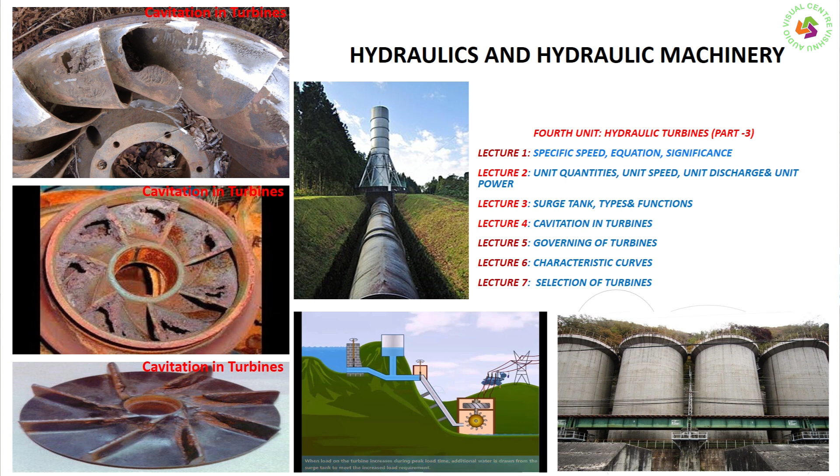Cavitation in turbines is a prominent phenomenon in reaction turbines. In impulse turbines, cavitation does not arise because the pressure everywhere is atmospheric pressure, so there is no question of any increase or drop in pressure. We don't see this phenomenon at all there.

But in the case of reaction turbines, we find that the pressure at the entry into the turbine is high, whereas the pressure at the exit of the runner is negative, meaning it is less than atmospheric pressure.

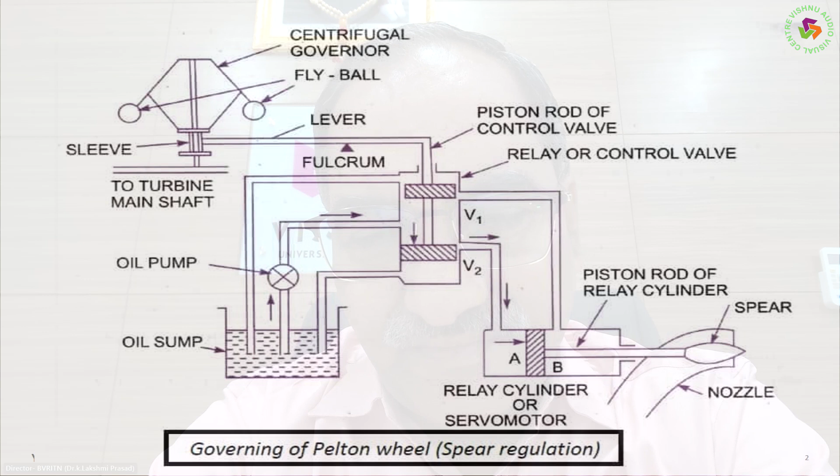There is a possibility that this pressure at the exit of the runner may be as low as the vapor pressure, the vapor pressure of the flowing fluid. The pressure at the exit of the runner may be almost the same as the vapor pressure of the fluid.

When the pressure at any point is brought down to the vapor pressure of the flowing fluid, automatically the liquid changes into vapor bubbles. These vapor bubbles flow along the direction, and when they reach a high pressure region, they collapse.

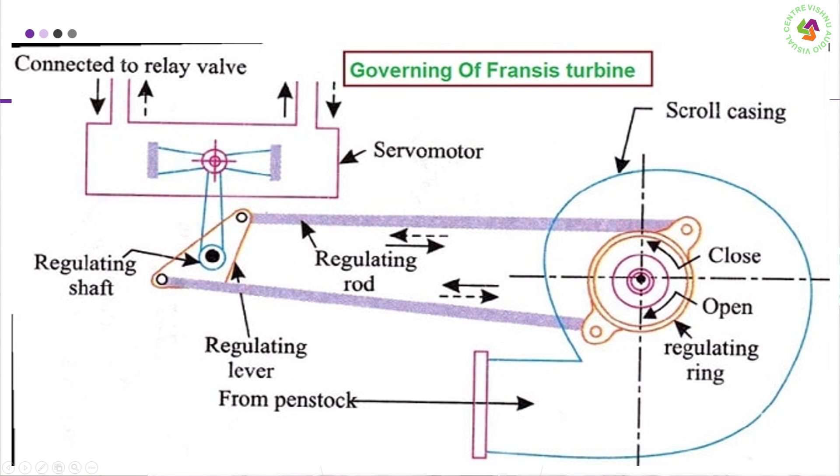When they collapse, the surrounding fluid rushes into this place. Thereby, there will be high impact pressure at that place. For example, this collapse of the bubble takes place near the boundary, on the runner blades, or at the entry to the draft tube.

So at that point, because of the high impact pressure, cavities will be formed. As these cavities are inside, which we will not be able to observe, over a period of time, these cavities extend, and finally the efficiency of the turbine drastically falls down.

So that is why we are supposed to continuously observe that cavitation does not take place in case of reaction turbines. Otherwise, the runner blades get damaged, the draft tube entry gets damaged, and this damage is phenomenal.

You can see the photos which I have placed before my lecture showing how the cavities are formed and erode the material of the runner, and that type of thing leads to fall in efficiency.

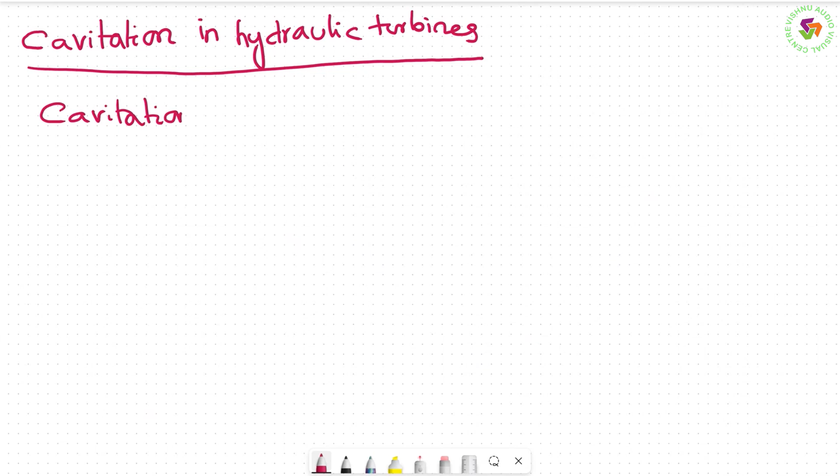So, cavitation in hydraulic turbines. Cavitation is generally observed in reaction turbines. In Pelton turbines, cavitation is not possible.

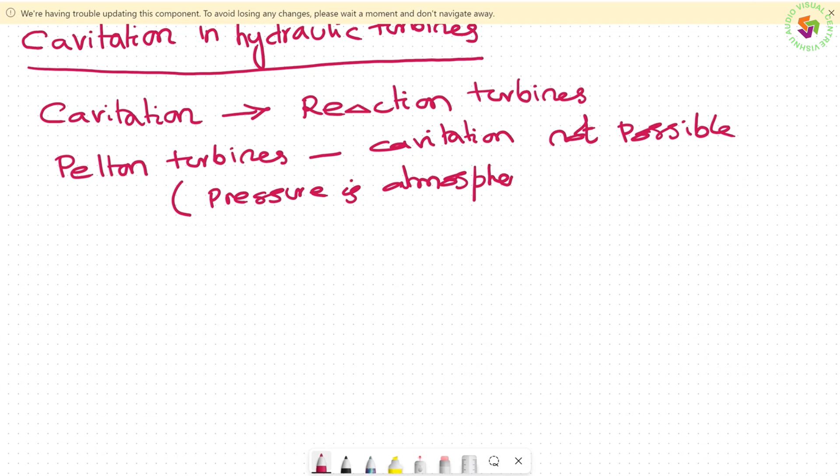Why not possible? Pressure is atmospheric everywhere. Whereas in reaction turbines, pressure at the entry is high and at the exit it is negative.

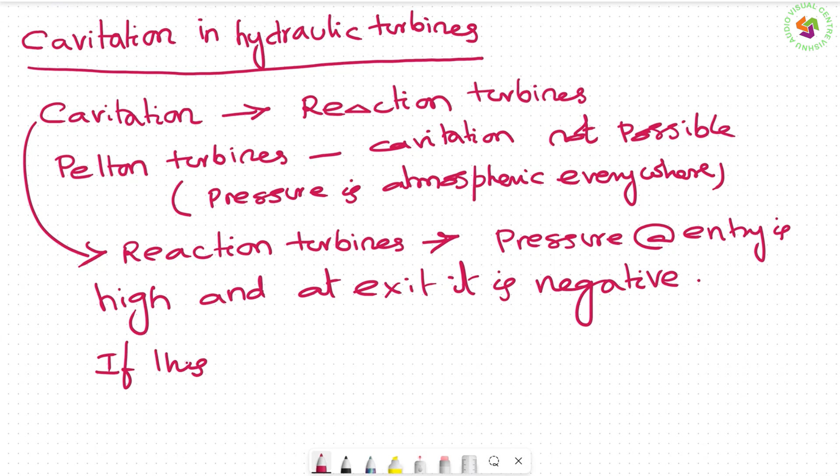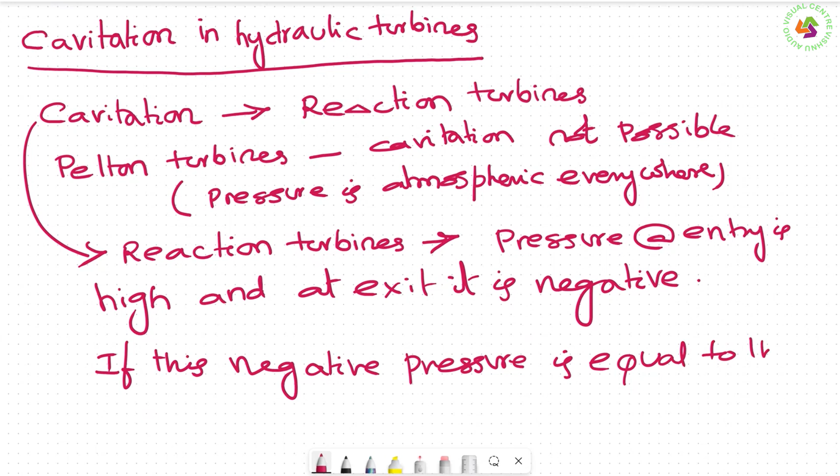If this negative pressure is equal to the vapor pressure of water, then cavitation occurs.

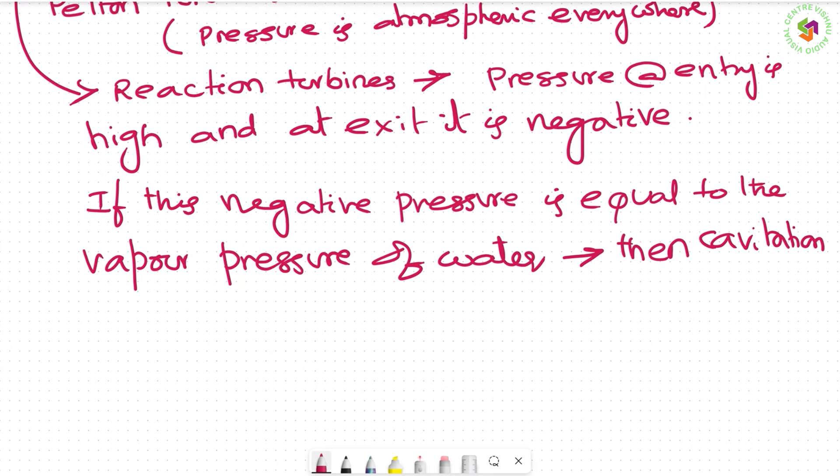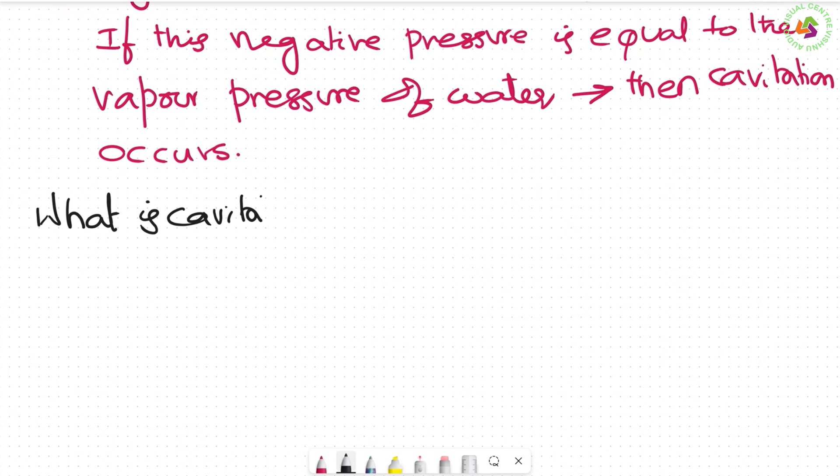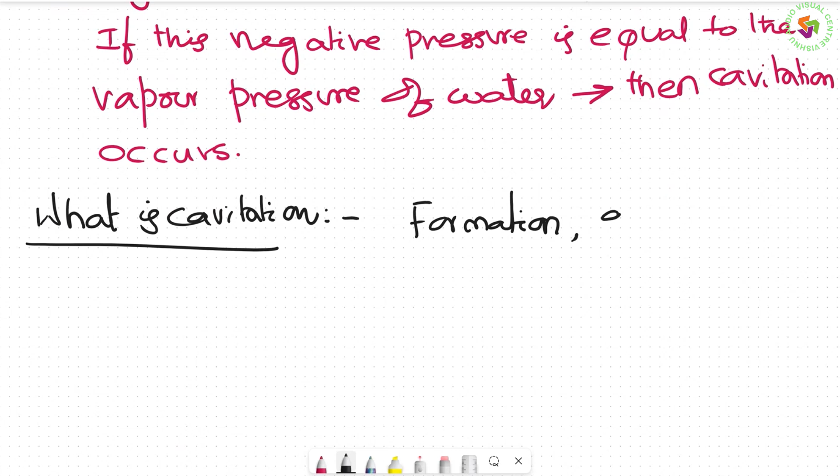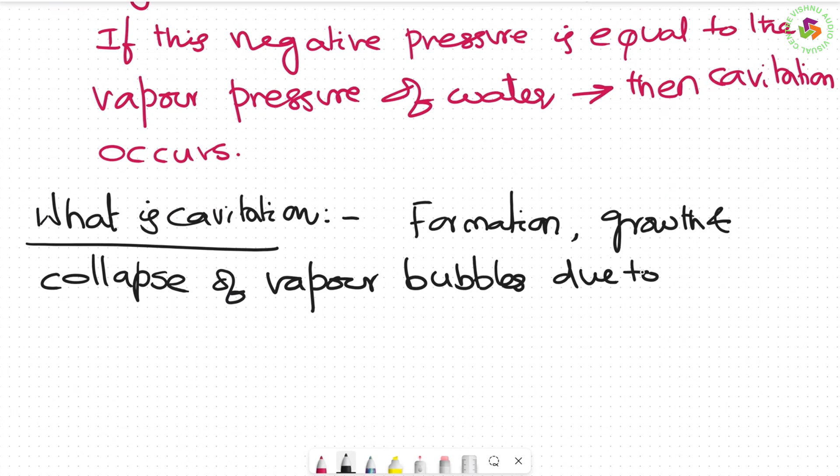Then what is cavitation? Formation, please note it, formation, growth, and collapse of vapor bubbles due to reduction of pressure to vapor pressure of fluid at a point is called cavitation.

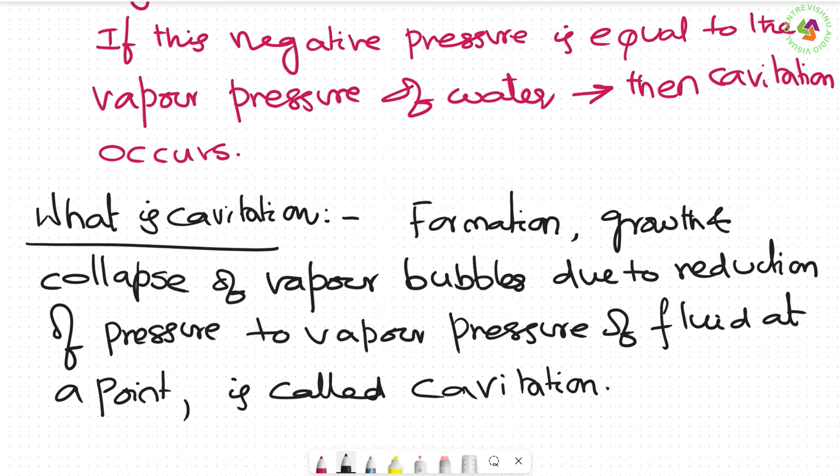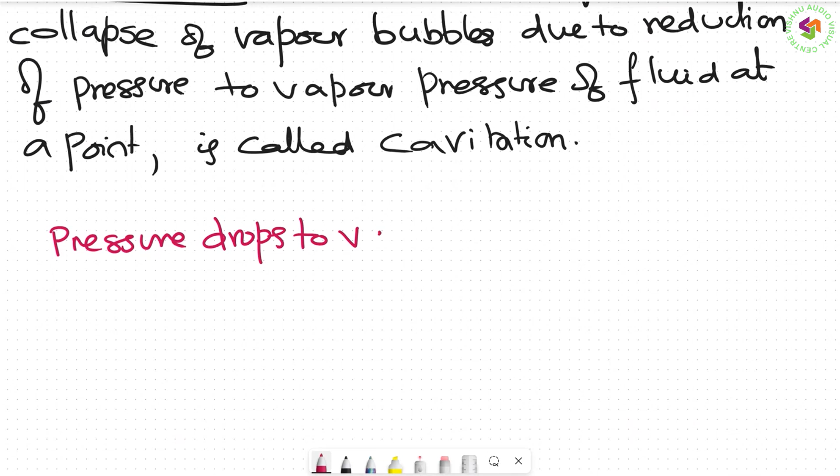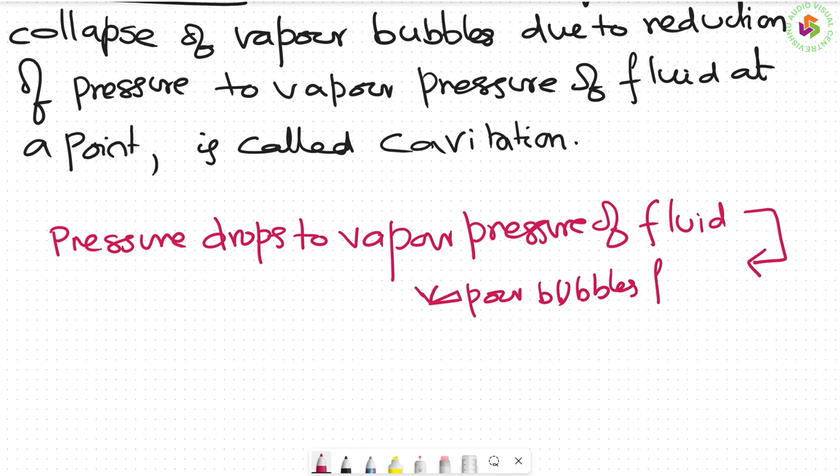So in cavitation, when it occurs first, if the pressure drops to the vapor pressure of the flowing fluid, cavitation occurs. The moment pressure drops to vapor pressure of fluid, vapor bubbles form, and these vapor bubbles travel along the flow.

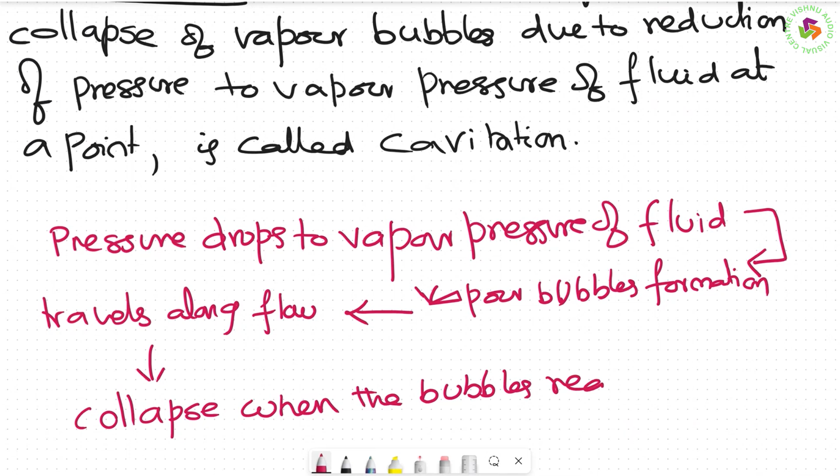And then what will happen? They collapse when the bubbles reach a high pressure zone. Then the surrounding fluid rushes into the collapsed bubble and applies a very high impact pressure.

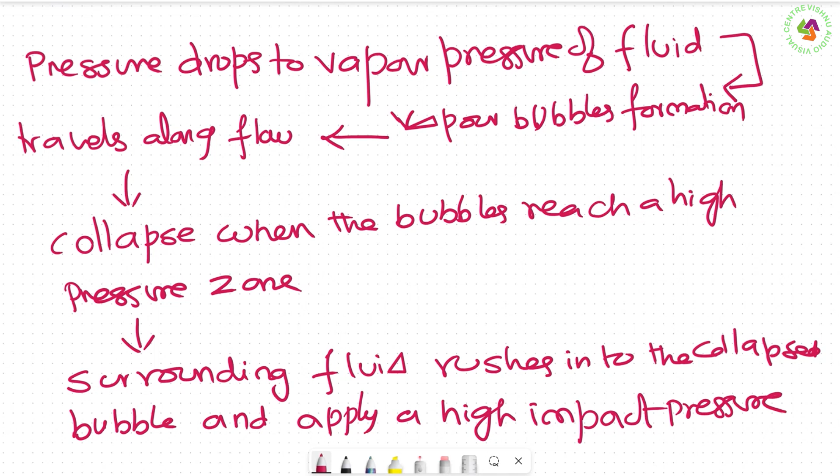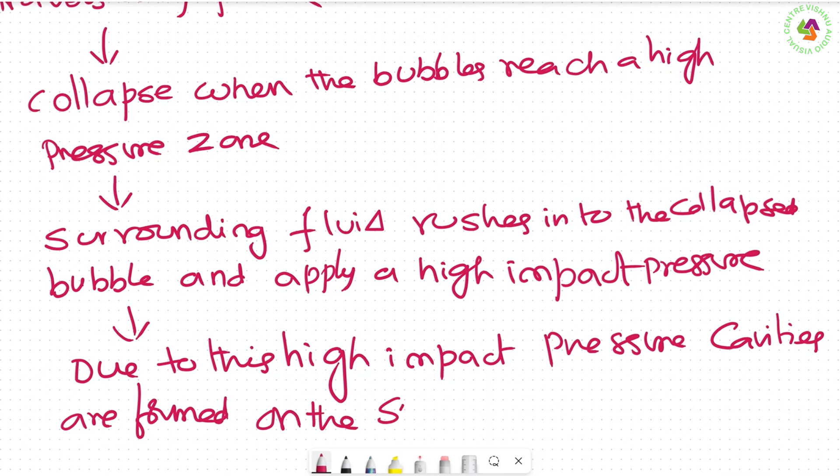Due to this high impact pressure, what will happen? Cavities are formed on the surface. For example,

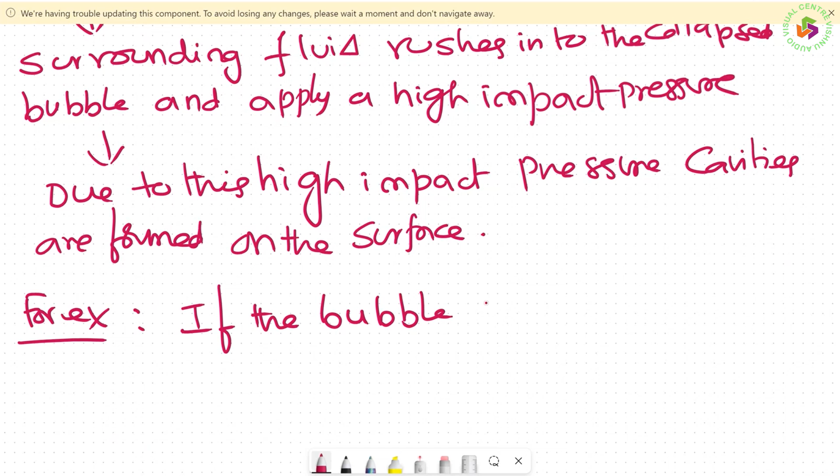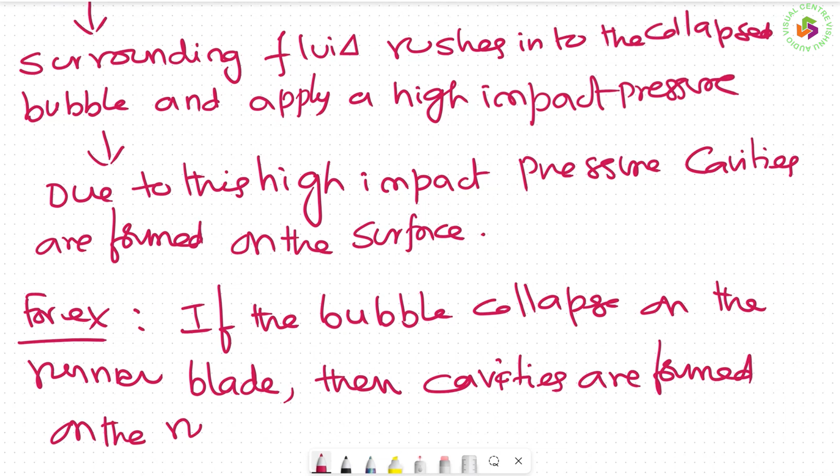if the bubble collapses on the runner blade, then cavities are formed on the runner blade. And what does it result in? A drop in efficiency.

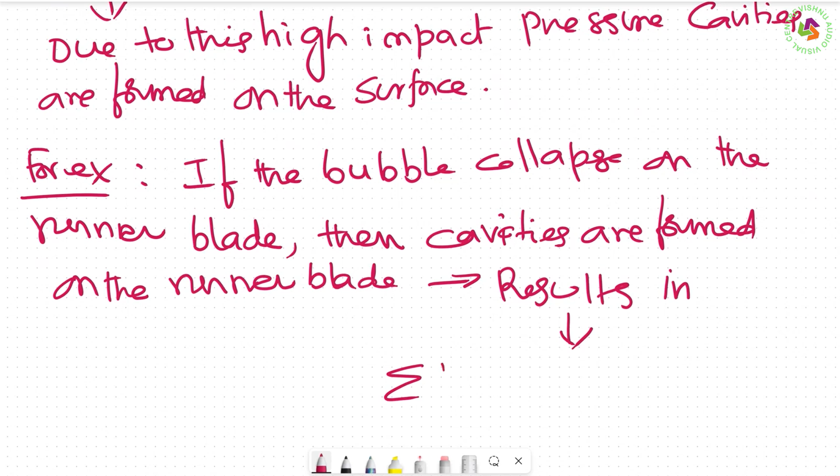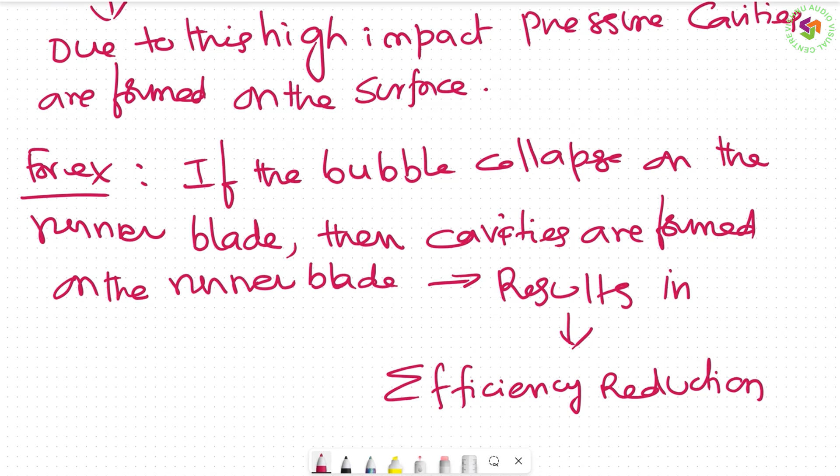But remember that this spoiling of the runner blades, we will not be able to see. That is one of the difficulties. So inside, it goes on for a long time. Today maybe a small chipping on the runner blade, but tomorrow, as time progresses, that chipping goes on increasing.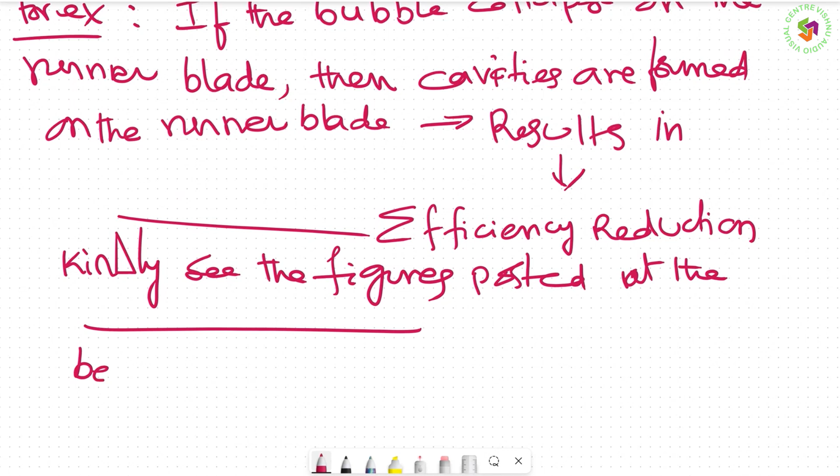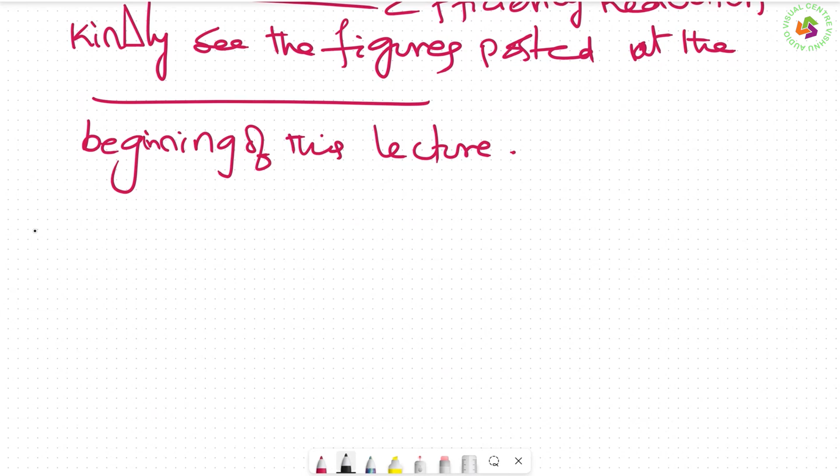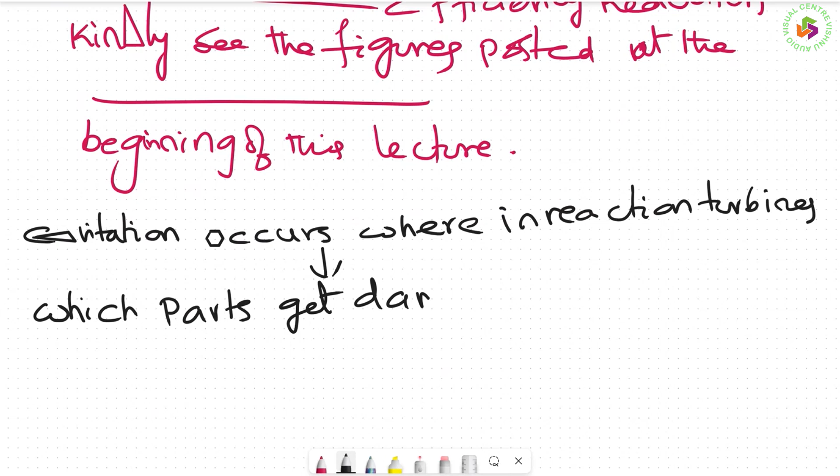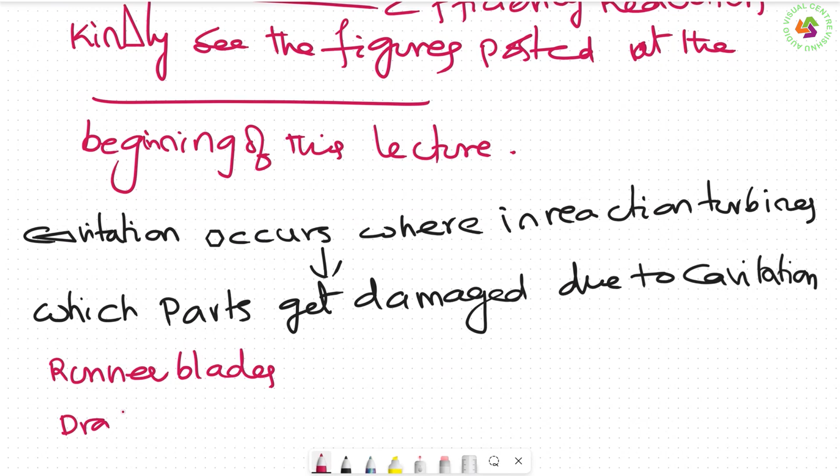So next, where does cavitation occur in reaction turbines? In other words, which parts get damaged due to cavitation? Number one is the runner blade, and number two is the draft tube. These are the two components which get damaged due to cavitation.

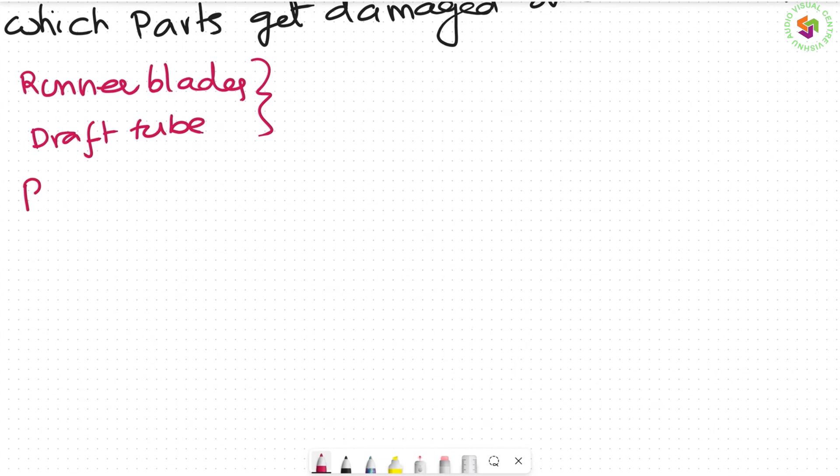So how do we really prevent this cavitation? There is nothing like a cure for it. Only with certain measures can you take steps for prevention.

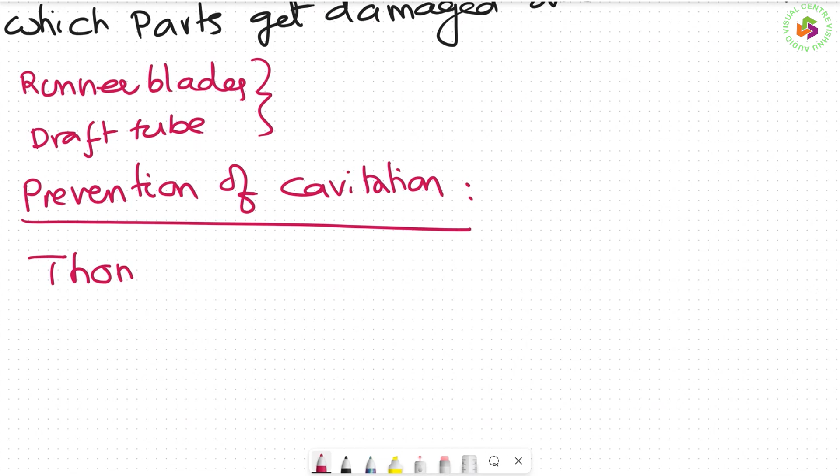There is one factor we call the Thoma's cavitation factor, very important, denoted by sigma. It is defined by Thoma as sigma equals HA minus HV minus HS, divided by H.

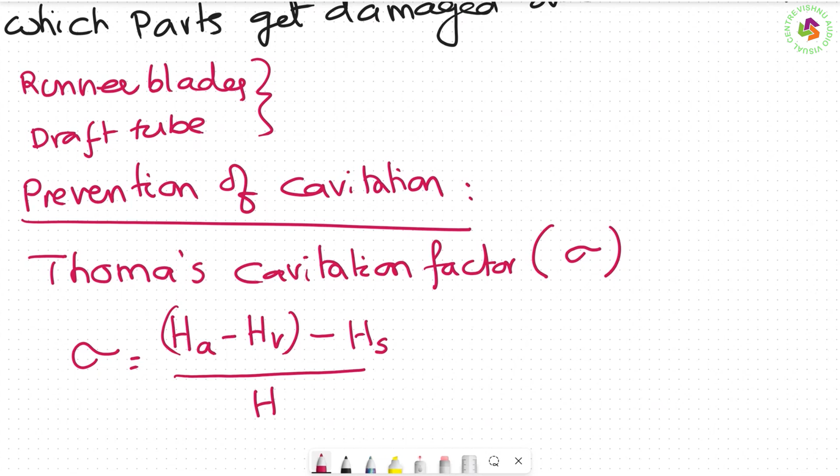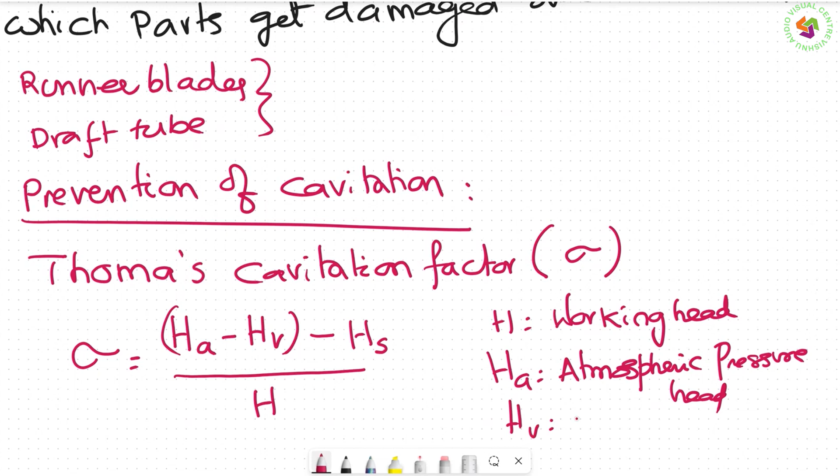What are these terms? H is the working head, that is the net head acting on the turbine. HA is the atmospheric pressure head. HV is the vapor pressure head, related to the liquid.

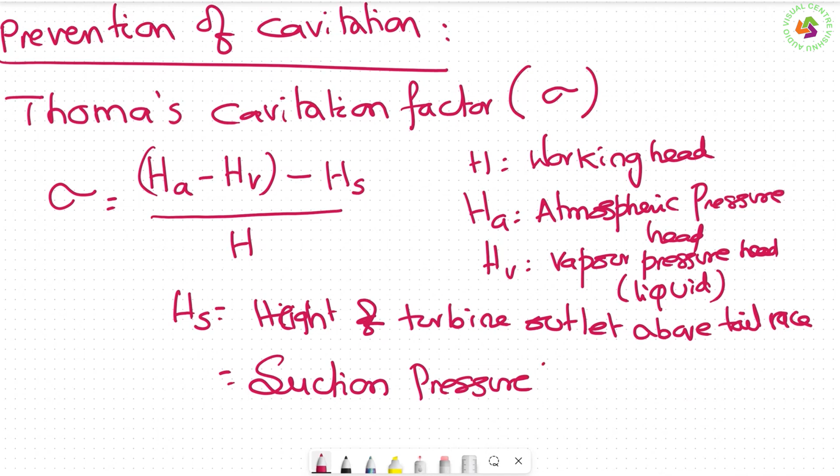Then HS is equal to the height of the turbine outlet above the tail race. This is also called the suction pressure head by some people, meaning the height of the turbine outlet above the tail race.

Using these factors - since atmospheric pressure is known, vapor pressure head for water is known, the height of suction (suction pressure head) is known, and the total working head is known - we can calculate sigma, knowing HA, HV, HS, and H.

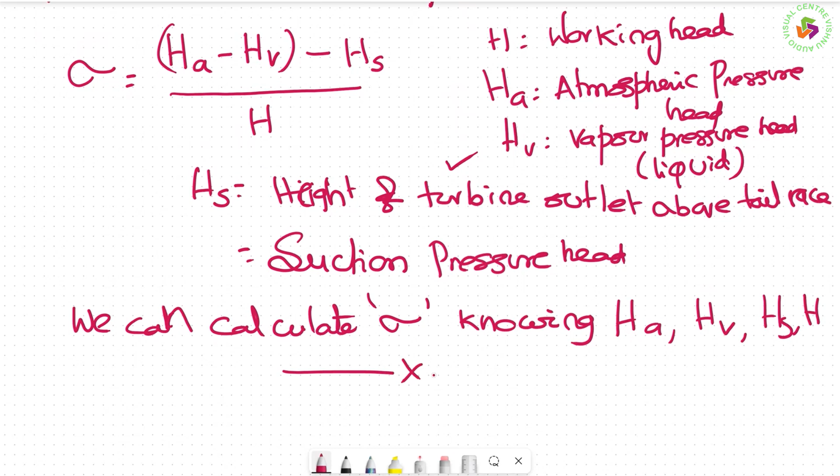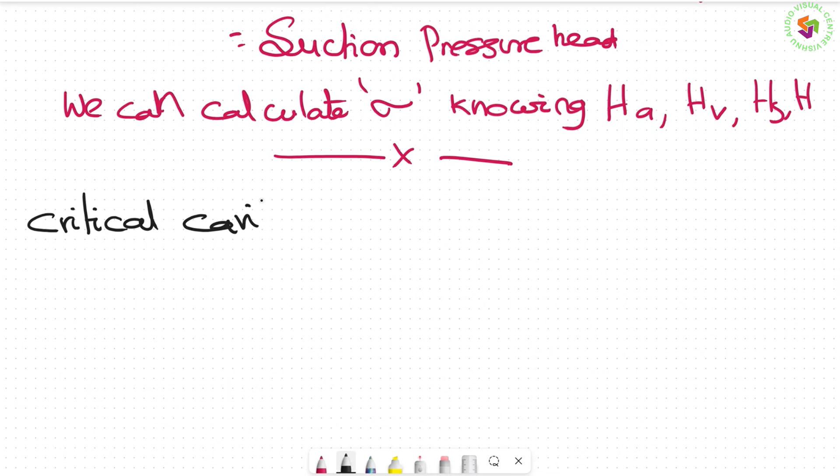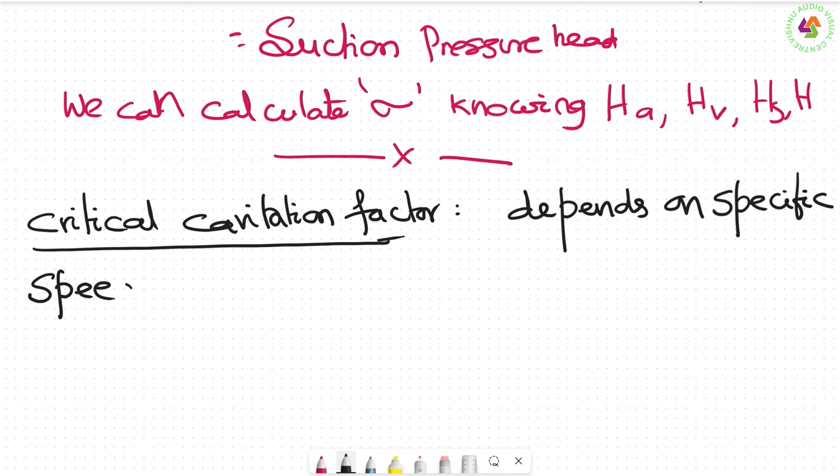Then what is the other thing? There is one more point called the critical cavitation factor. This critical cavitation factor depends on specific speed.

For Francis turbine, this value sigma C is equal to 0.625 into NS divided by 380.75, whole square, where NS is the specific speed. So knowing the specific speed, we can calculate sigma C.

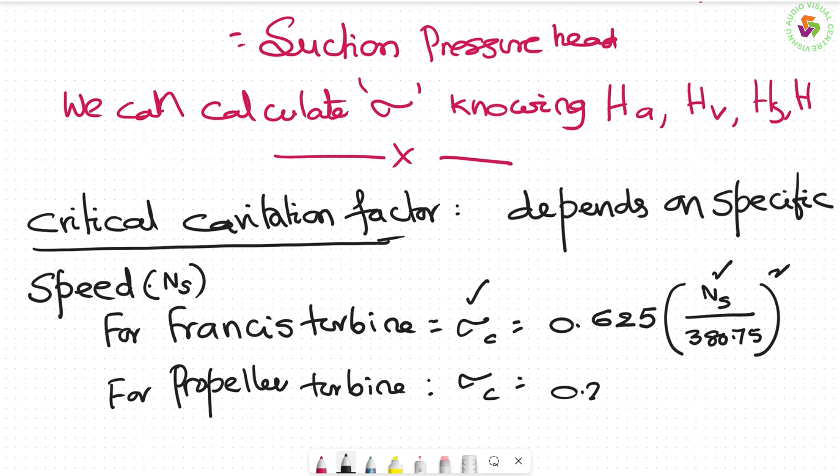For propeller turbine, sigma C is equal to 0.28 plus 1 by 7.5 into NS by 380.78, whole cube.

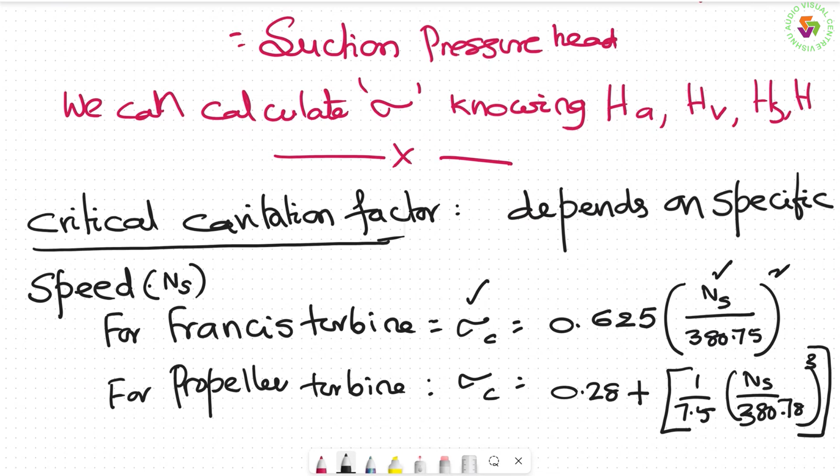But we are not interested in propeller turbines; for Kaplan turbine, sigma C is 10% more than propeller turbine, because the propeller turbine formula is given, so for Kaplan turbine we generally take 10% more.

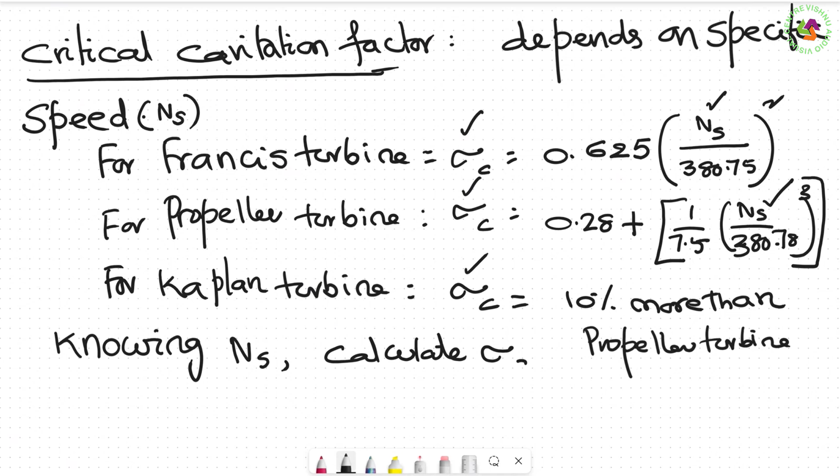So in all these equations, NS is known, and if NS is known, sigma C is calculated. So knowing NS, we calculate sigma C. Now we have two things with us.

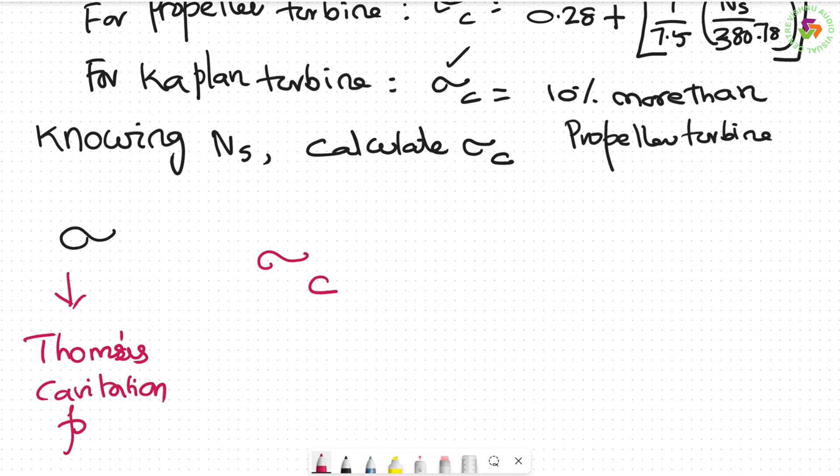One is sigma, the other is sigma C. Sigma is the Thoma's cavitation factor, and the other is the critical cavitation factor. So these two are known to us.

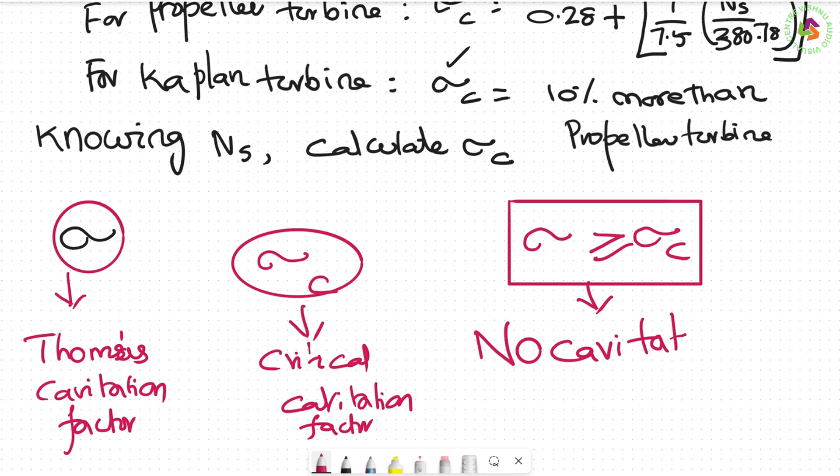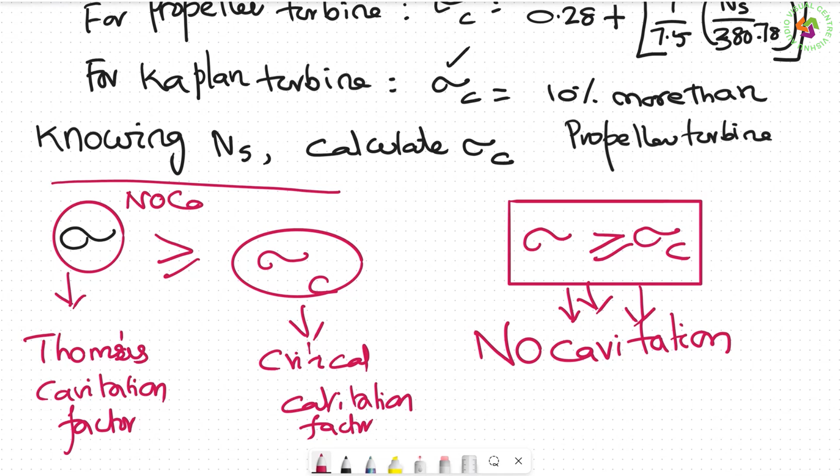Knowing these two: if sigma is greater than or equal to sigma C, then there is no cavitation. Please remember, if sigma is greater than sigma C, no cavitation occurs. If sigma is less than sigma C, cavitation occurs. So always remember that your specific speed should be such that your critical cavitation factor is less than your Thoma's cavitation factor.

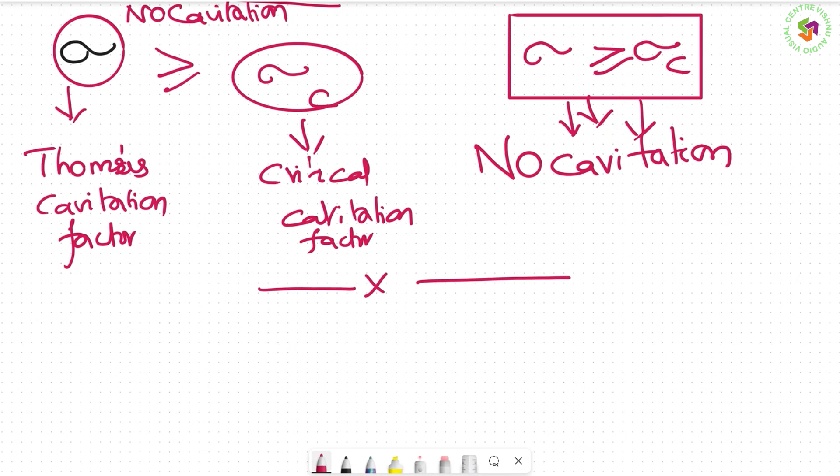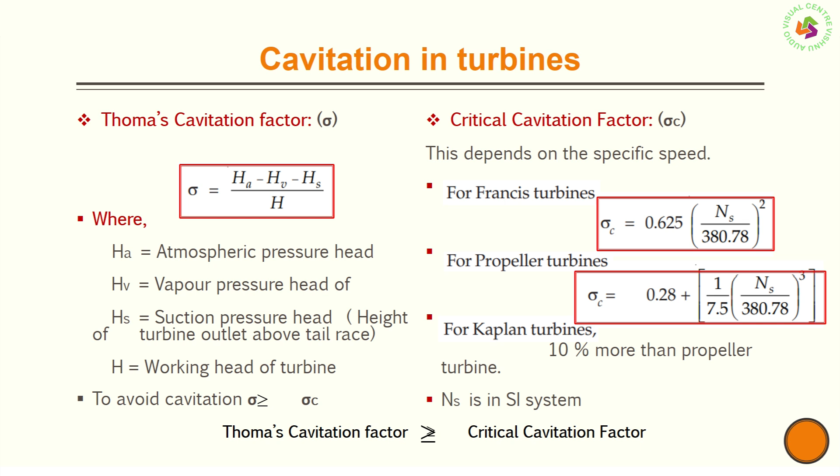This we should remember. And here I will stop this lecture on cavitation in hydraulic turbines. Let us summarize two things and learn the important points. The first thing is that cavitation in turbines occurs in reaction turbines, whether Francis or Kaplan turbine.

Second, which parts get damaged because of cavitation - the runner blade or the beginning of the draft tube. Third, why do they get damaged? Cavities are formed because when the pressure is less than the vapor pressure of the fluid, vapor bubbles automatically form. If these vapor bubbles collapse, cavities are formed. This we should remember and then move forward.

With this, I will stop this lecture.